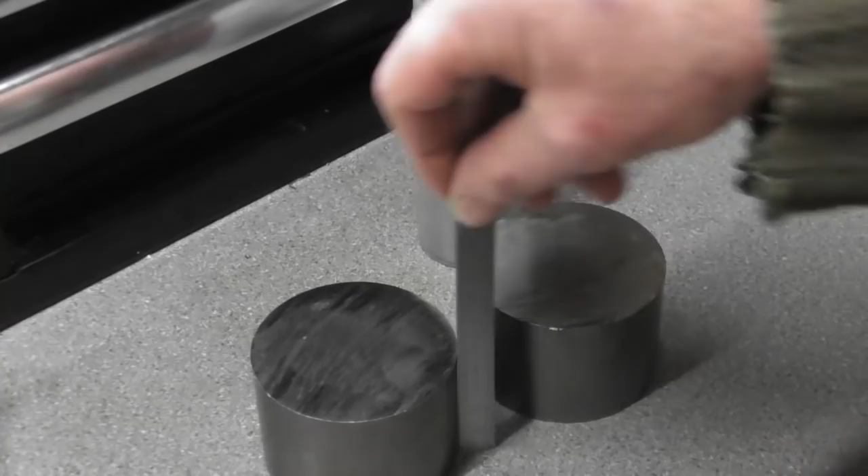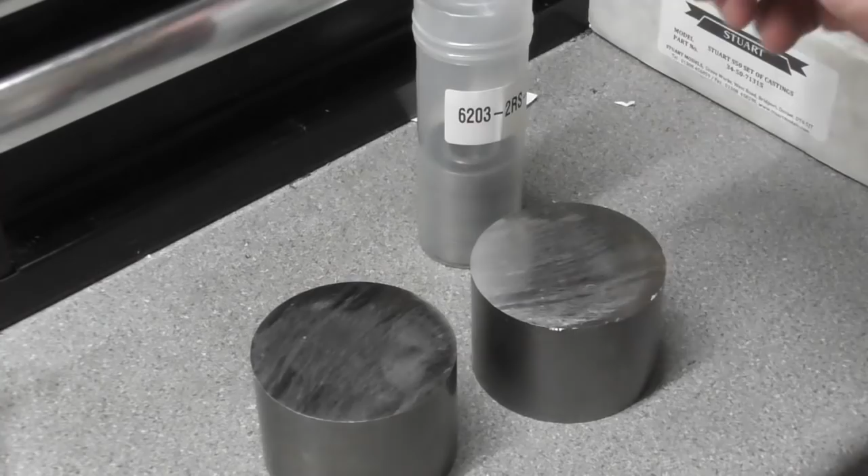I'll give you a little bit of an overview of what we're going to be making, and we'll jump straight to the lathe. First part of the project, 2 slugs of steel here, 70mm diameter by roughly 50mm long. These are going to be turned on all faces and are going to be, if you think of a flanged wheel with a bearing in front and rear, hole through the middle, and some grooves in the flange. These are guides for the blade - the blade will run up against the flange at the rear and sit on the flat portion, and these will guide the blade.

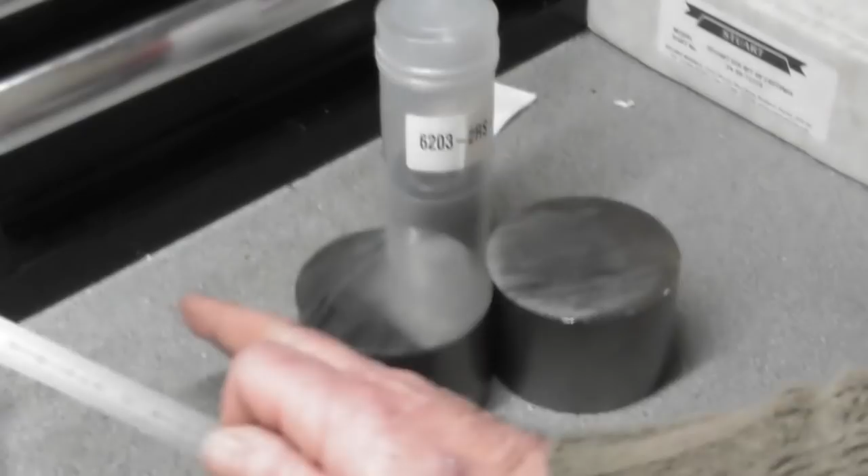So there's 2 of those to make. And then moving forward, I've got 2 square pieces of steel here, and some - if you think of them as large rose joints - these square bars are going to be turned down over a length to suit these rose joints, and these are going to form part of the adjustment to align the aforementioned rollers. So we're going to jump to the lathe with one of these, get set up and get turning.

So the first thing we need to do is to put the part up in the chuck. I've had to use my reverse jaws here because the external jaws on this little 100mm chuck, if I use the external jaws, they're at the point where they're just about to come out of the chuck to hold this 70mm stock. I'm just going to have a quick look, see where we are. Seems to be running fairly true.

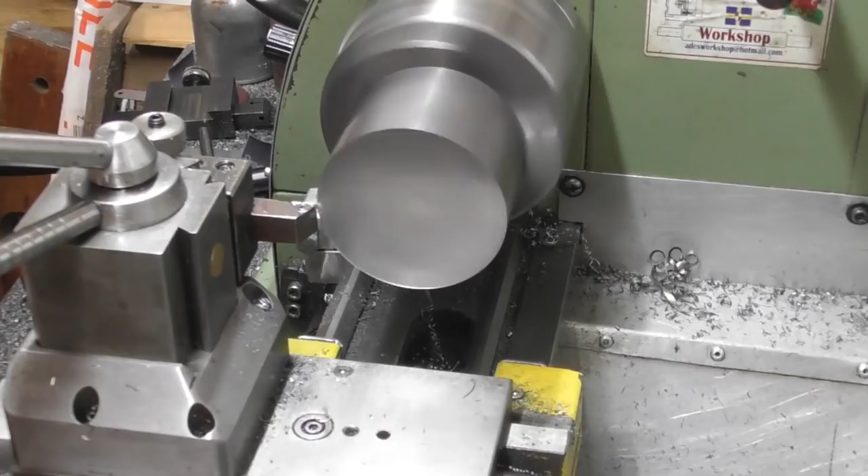And the usual first operation is going to be to face this off. Saw cut's not quite straight. So this will bring this face true to the rotation of the lathe. Nearly there, a bit more. So centre drill now, a little bit of cutting oil.

With a live centre now. And that's good - that's held the part in the chuck a lot more securely, and I should be able to rough it out or go a little harder at it now.

So my drawing calls for a diameter here, a 51 diameter, back a distance of 25mm. So I just touched off on the front face. I'm very much going to be heating this thing up and getting it hot. So roughing operation, I'm going to take it back 24mm and down to about 52mm diameter. I'm just coming up on a cut now with a power feed. I'm taking 1.5mm off a side - that's 3mm off the diameter in one go.

Seems to be behaving alright. Let's turn the feed up a little. Power feed, I'm just taking it gently. As I said, this is a little lathe, but yeah, to take 3mm off that 70mm diameter in one pass isn't bad considering.

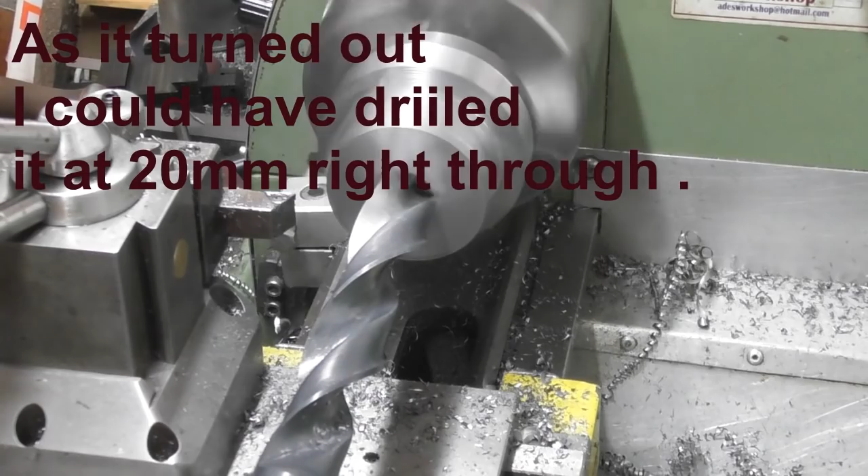I've got a boring bar up now. We're just taking a couple of cuts out of there, squaring it up. We're going to finish it to around the 17mm mark. Just boring it out now to 11.5 deep, and again I'm going to leave it a millimetre undersize on diameter.

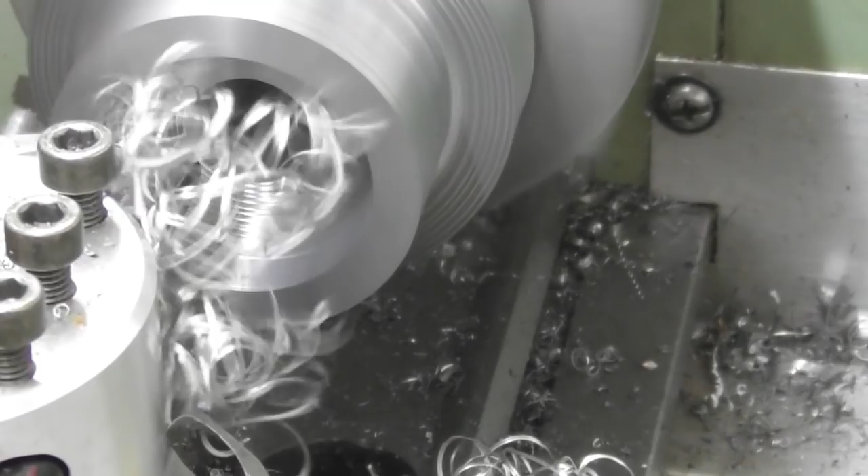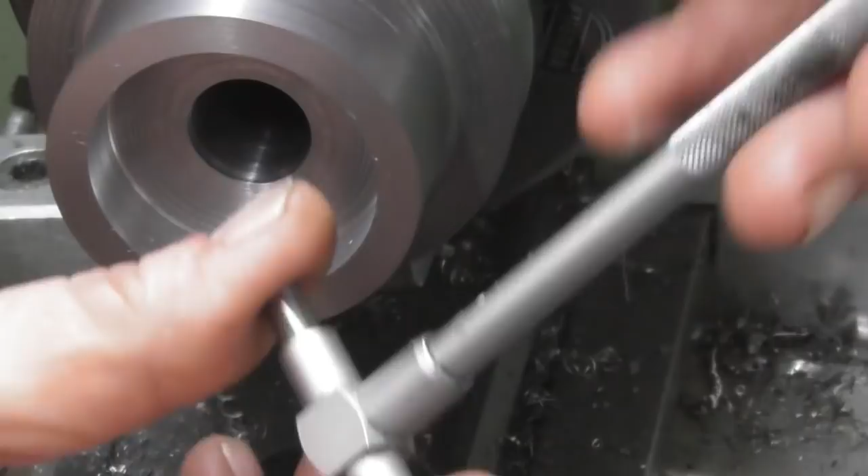And that should be it. May have to run that cut through again, we shall see. So I'll just get my snap gauge. I don't quite like the way that feels. There we are, so that's my gauge. In with the micrometer.

That's just rubbing there. Is that in shot? I think it is. 1.5 hundredths over 40mm. Perfect.

So with a bit of bearing fit, let's just check we've got no errors going on. I'm hoping that just... I can get it started. I'm not going to push it any further than that because I've got to get it out again. But as you can see, I'm facing that back face, coming out to my 0 where I machined the diameter.

I'll just go back in, and I want to machine it. I'm going to machine it to 12.1mm. There's 12. That'll be the shoulder the outer race sits against. We're there. And I'm going to go on my readout 12.1. So that's the finishing pass in the bottom.

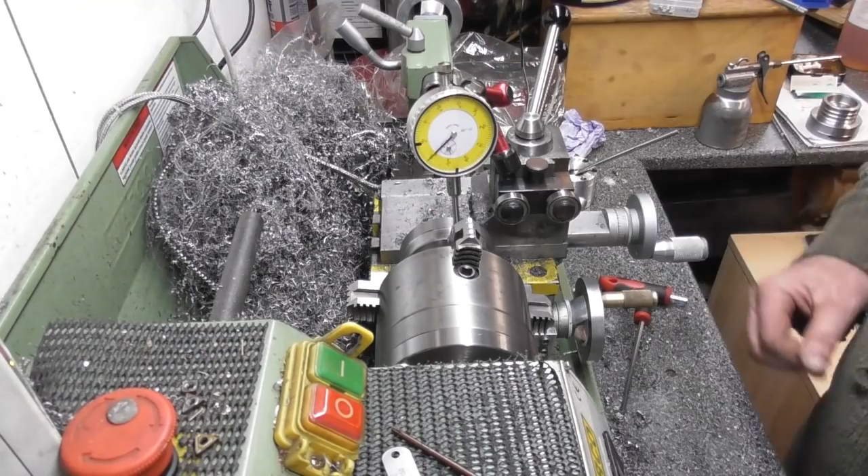We've made quite the mountain of swarf. Right, I put the part in, back to front, and it's in a 4-jaw chuck now. I've just eyeballed it in.

As you can see, it's running out. I'm picking up on the OD. In fact, let's get somewhere nearer the centre. Where are we? We're probably 0.4, 16 thou out. Okay, find the high point.

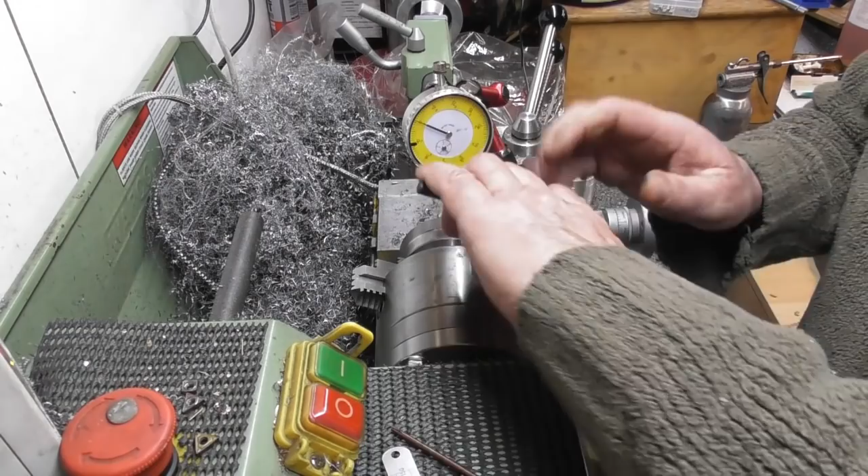That jaw there, and the low point, I'll have to lower it off a bit. Okay, back round to the high point. There. Tighten down that jaw, somewhere in the middle. Vast improvement already. High point.

Probably about there. The low point is opposite. Loosen up a bit more. There we go. Let's have a look at that. Tighten a touch.

A bit high there now, just to nip that jaw back up. Right, where are we now? 0.15, 6 thou. Right, so we're on a different high point.

There's the high point. I'm winding these jaws down onto some aluminium, between the aluminium and the workpiece. High there. Low opposite, so we'll have to loosen that jaw a touch. Around the other side, tighten that one a touch. Here we are, getting close now.

High here. Now I do need to get this job on, so I'm not going to bore you with me spending 10 minutes on this. That one.

Well, we're down into 10 microns now. Okay, so we clocked it in on the OD. I hit it back hard against the chuck, so I know it's running true as far as wobble in this sort of plane. And I've also put a clock in the bore here, and that's running true as well.

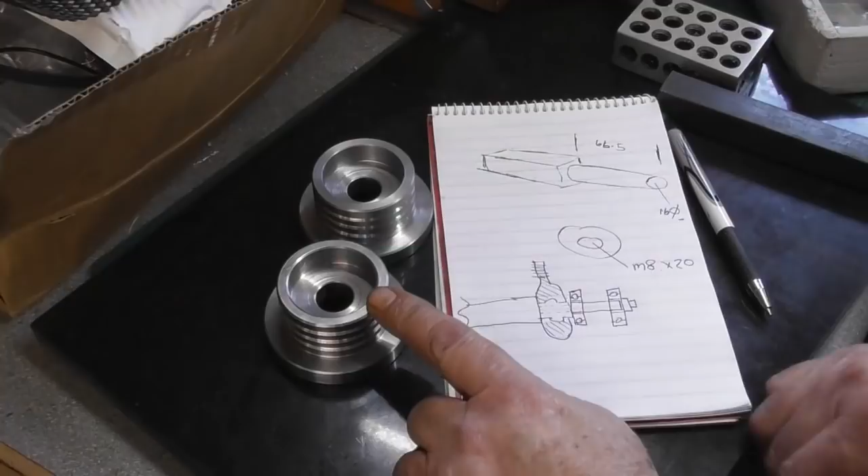That's it, just put the chamfers on, the undercut, same on the other side. Happy days, one done - I enjoyed making that part so much I made another one. So that's the two of those done, off for a bit of chemical bluing.

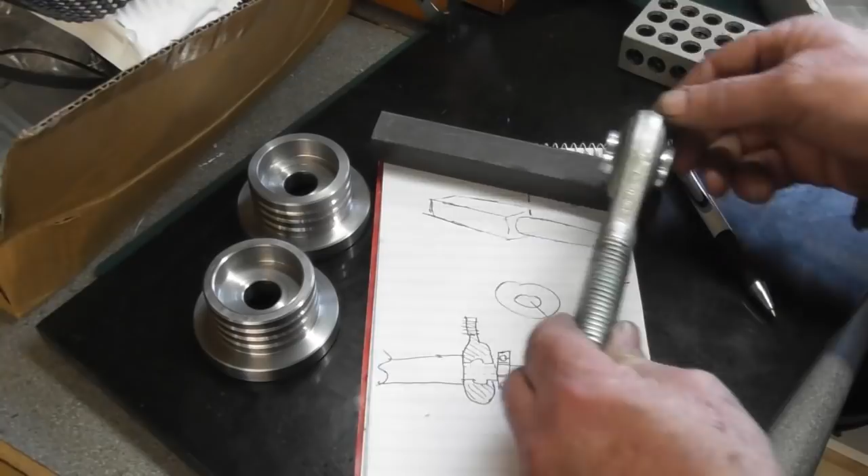I am going to have to modify them. I'll show you the drawing here - can you see it? Right, the original plan was to turn down the piece of bar, 16mm diameter, a nice gentle press fit for the bearings on the 16mm. This part, the swivel, has to go on first, as you can see in my sketch.

Now if I'd have just press fitted them on and put a circlip groove in to retain it all, it would have been difficult to get apart - you would need pullers and all the rest of it.

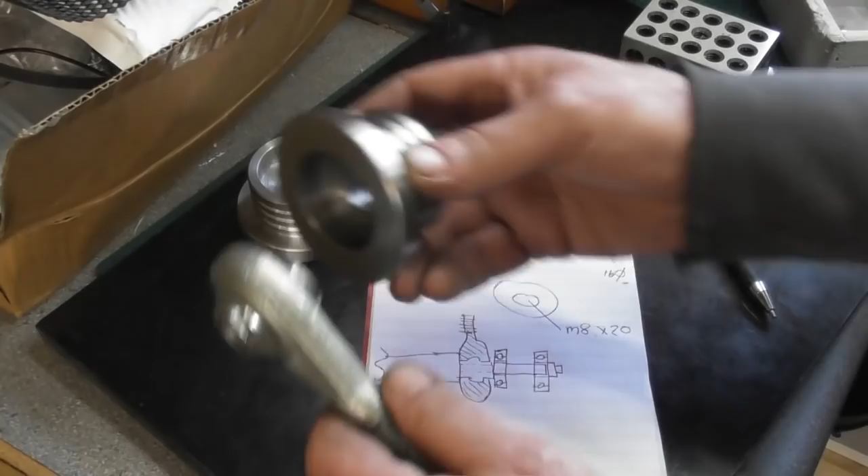So plan B was to have a draw bolt in the end, which was Kris's original idea. I would make the bar slightly shorter than the combined size of the pulleys with the bearings, and then when you pull it down with a bolt it'll compress on the bearings and hold everything, stop it rotating. The only drawback is that it would put compression on the inner races of the two bearings, and the bearings wouldn't last very long like that.

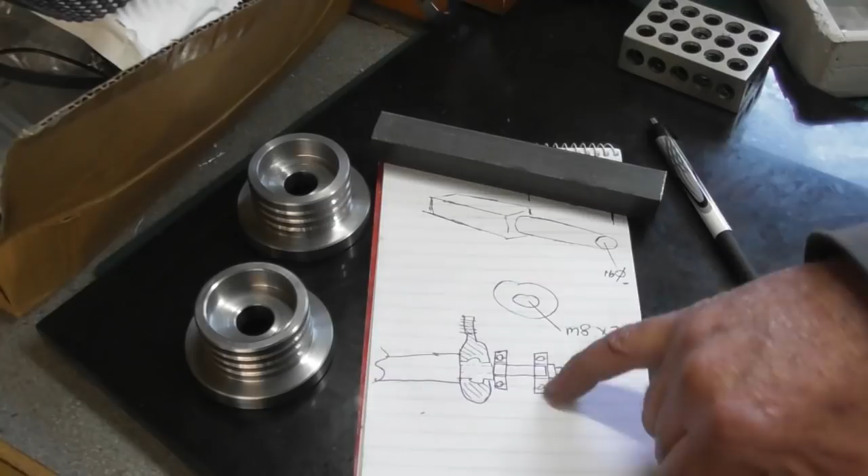So I'm going to have to make a spacer, a tube spacer that goes between the two bearings. Inside here it's only very narrow, so that when it's clamped up with end pressure, it's not trying to collapse the two inner races together.

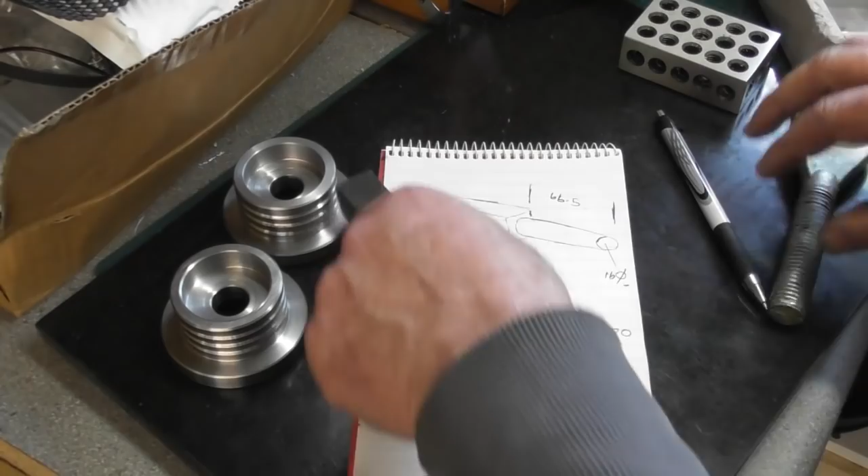So yeah, that's what we're going to do - we're going to open up the holes in these. I'm going to turn these bars down first to fit. I'm looking for a length of 66.5mm. 67 is the combined size of these two, this being 32 and these being 35. So yeah, happy days, we'll do it 66.5.

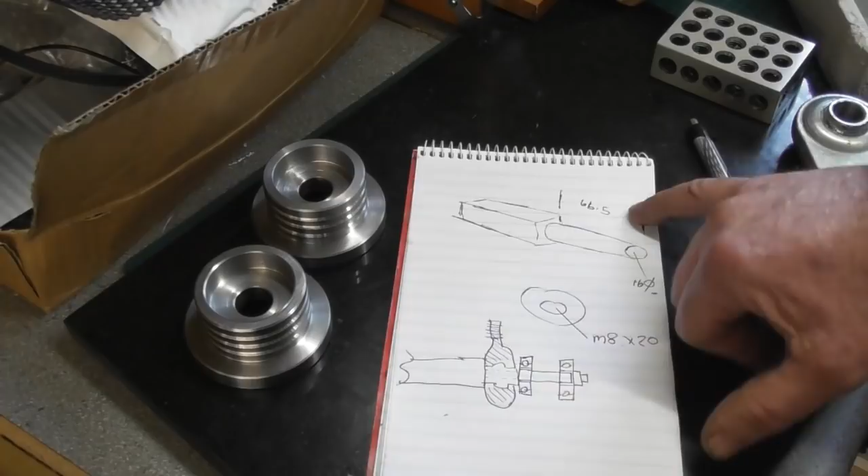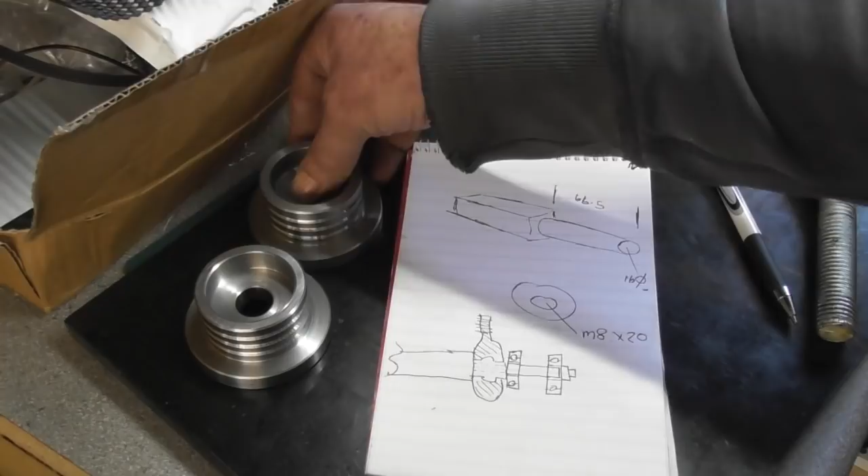That'll leave half a mil for clamping on the end, and we'll make up a nice washer, and put an M8 bolt, probably drill and tap it in the end, 20 mil long. Then we'll open the holes up in these, make some tube spacers at a clearance on the shaft, exactly the right length, maybe 0.1 bigger than the closed bearings, just so that it's clamping on the spacer, not on the pulley - and we're away to go.

First of all, I'm going to put this bar in the chuck, and I'm not going to clock it up - I'm going to eyeball it up. I could clock it up, but I'm going to eyeball it up.

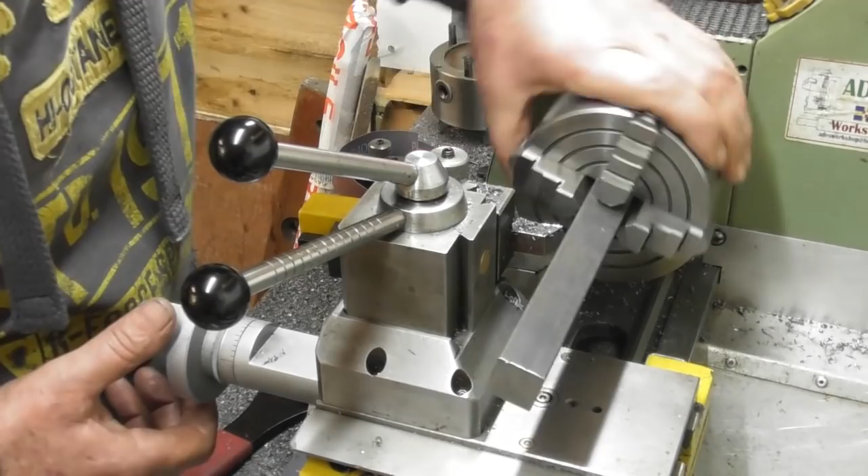I've got the chuck somewhere near. Yeah, if I just put a lathe tool in there, come back up by the chuck somewhere. There's plenty of meat to come off this, so let's just see. I'm just looking for the gap distance between the lathe tip and the square of the bar. Let me just go around tightening this up. I think we'll get it in one.

Let's come a bit closer with that tip. I think we're going to call that good. So I'm just going to start it up and have a look at it.

We're stuck out an awful long way, considering we're only holding about 25 mil in the chuck, which isn't a problem. But I think as I face this end off and put a centre in it, I'll hold it a bit more solidly. I'm just going to tickle this end off, I think - not going to go mad, or I'll end up with this bit of bar in my lap.

So this black mild steel, as we call it, it's always horrible knotty stuff. It's very soft, easy to machine, but it's sort of draggy and clumpy. Probably the best way to get a finish on this stuff would be high-speed steel, but it'll do all right with this carbide.

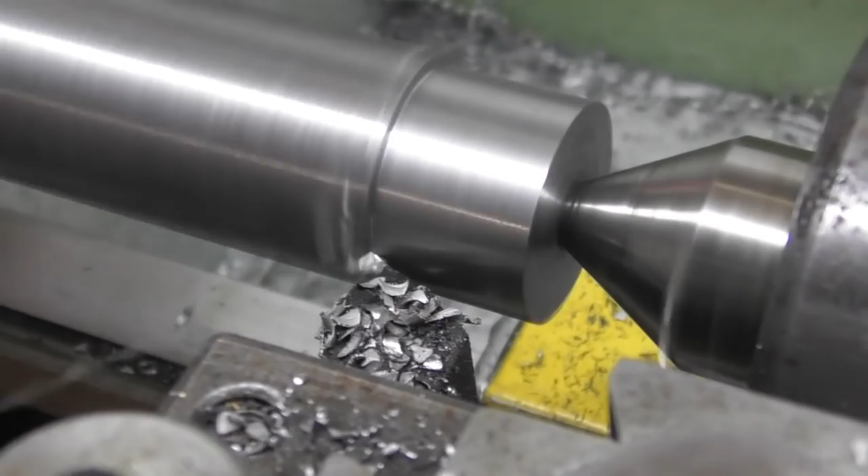Finishing cut now, and this should bring it down to 16 mil, or just slightly under. So that's the diameter finished.

Just drill and tap a hole in the end now, M8. I'll drill a hole about 22, 23 mil deep, and then tap it out with a bottom tap afterwards.

I thought I'd put the parts back in the chuck, in a 3-jaw, holding it internally on the bearing race on the back, and I'm just going to bore these centres out to 20.5 mil clearance on the bush.

I'm making some washers to go under the bolts on the front, nice thick beefy ones for the clamping bolt. It's an M8 bolt, so I've drilled an 8.1 hole through the middle there, just a bit of clearance. We'll have a chamfer on the leading edge.

Something like that, and then we're up with a parting tool. A bit of swarf in my tool post - I'll just line the parting tool up on the edge there, set a 0, and I want it 3.5mm thick. Here we go - lock carriage, slow it down a touch, not that slow, and we'll part it off.

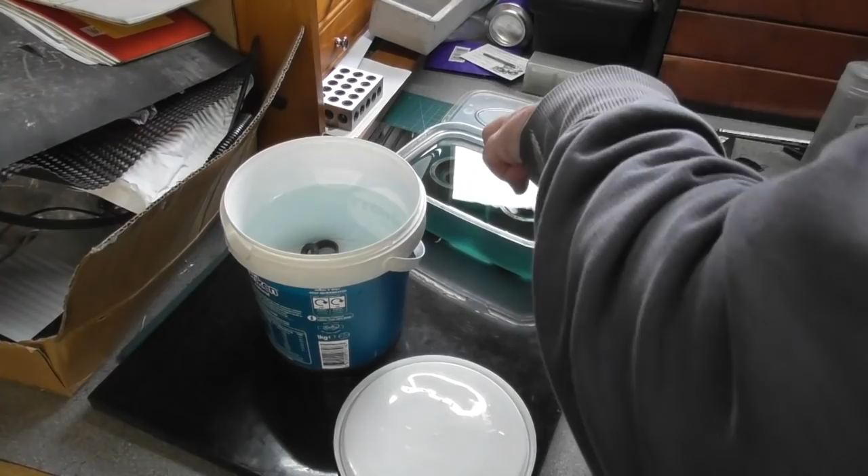Well, they've been in there for 15 minutes now. Don't appear to have taken that well on this occasion, but it'll have some protection. May give them a quick wire wooling and give them another session in there.

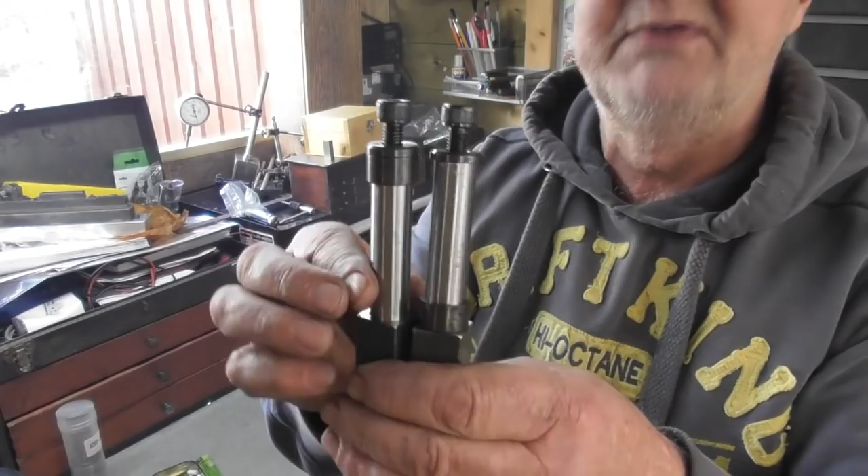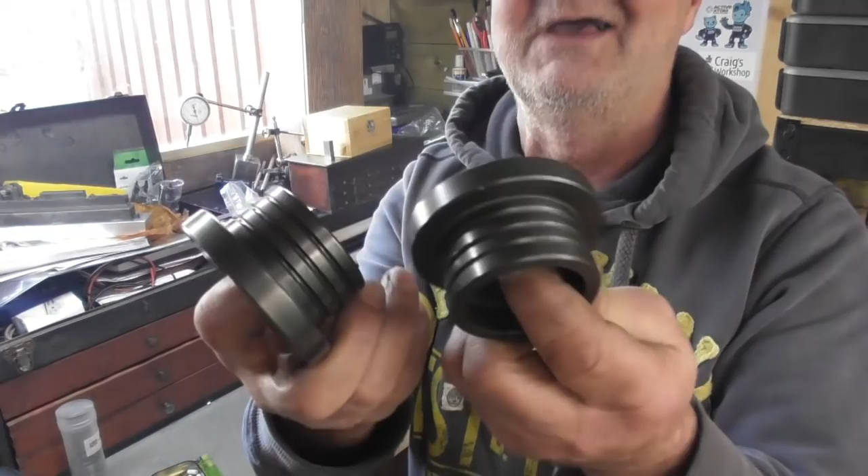Right, so that's chemical blued or blackened. Well, there we are - that's the shaft complete with the bearing spacers and the washers and the bolts all tapped, ready to roll. And of course the chemical bluing, although it's black, the chemical blacking on the two guide rollers. So that's the job complete.